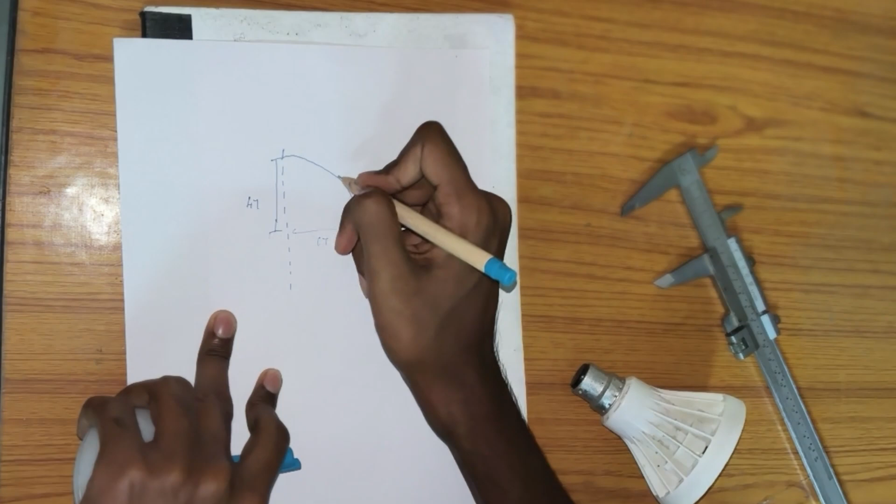We don't have the measurement instruments to take the measurement of this, so this is not actually the radius. This is actually the diameter, outer diameter 77. So to get the radius, we have to divide by 2.

Coming to this part, we have this structure you could see. A chamfer, a straight one, and a chamfer again, and a straight and a chamfer, and a whole straight to this, and a 90, and again a straight, and again a 90, and a little curved one.

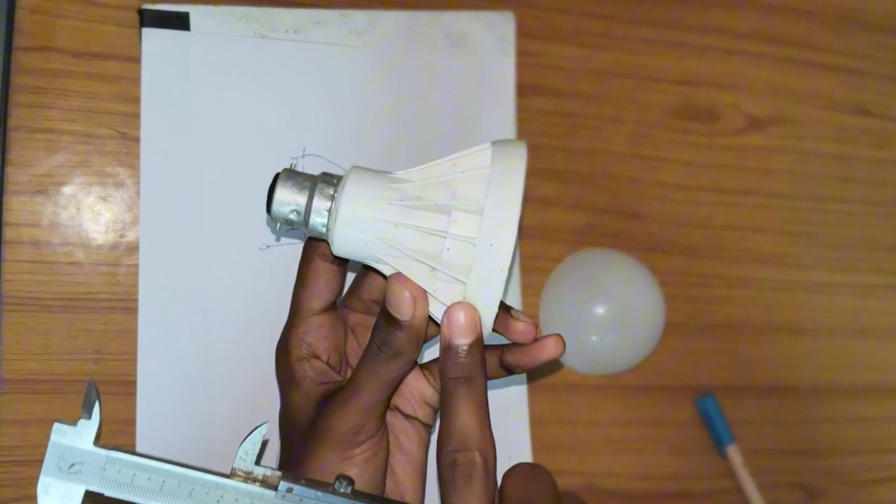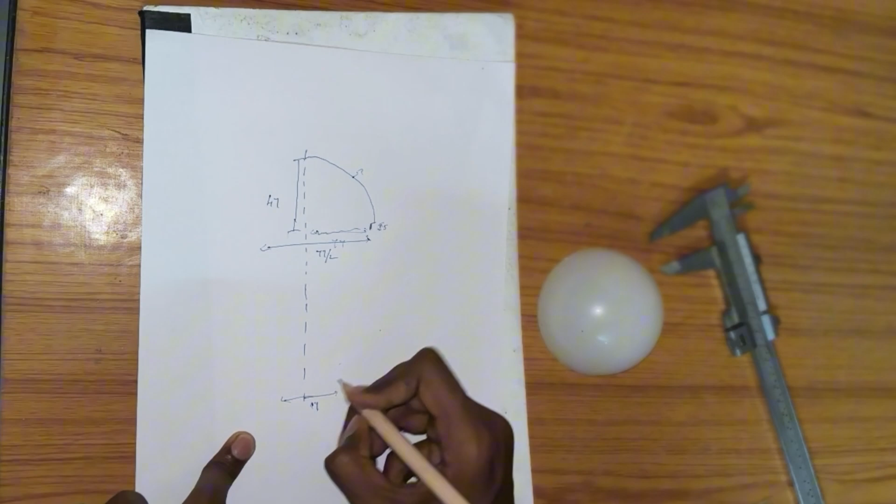So what you are going to do is use the same method, Revolve. We are going to first take the outer one. So this one is actually 47. From here, this is the total - we get 47. And coming here, this is a little one.

Getting the length of this one, you can use the back side of the vernier. So for that you get 12. So the height of this is 12. Maybe the chamfer parts could be just approximate for this one - for the upcoming videos we could get the accurate reading of those.

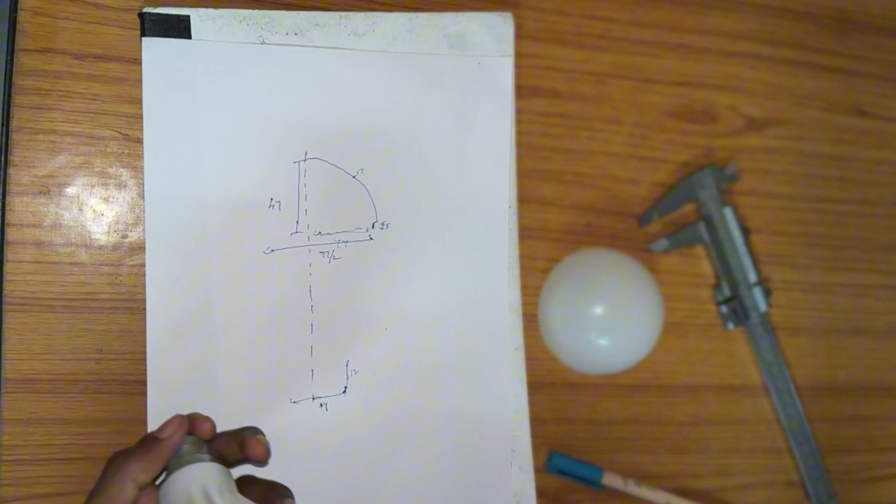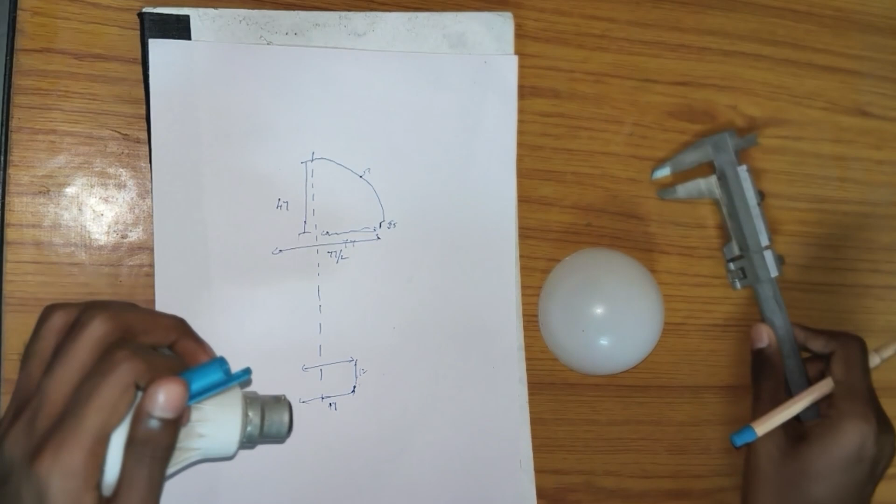Then after the chamfer, we can go with this, again it is 9. From here to here is 9, the height of this. So for this, the outer diameter is

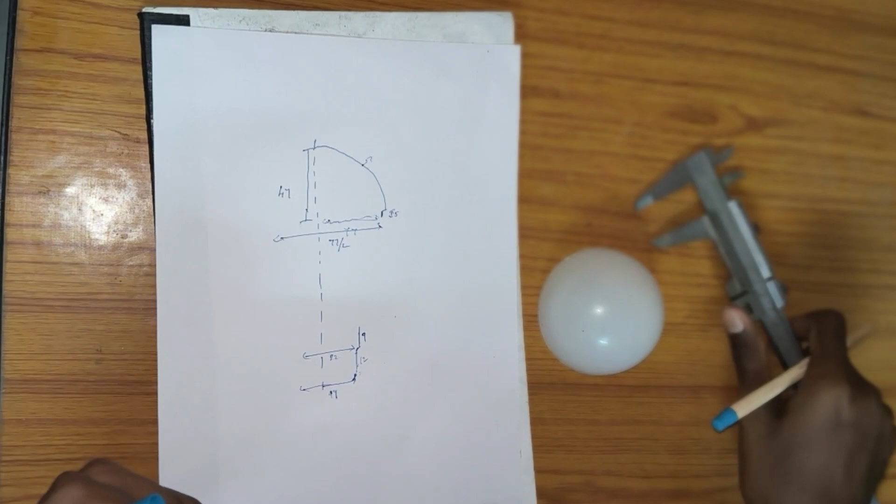22. So it is 22. Then we have to measure this, and this is 9, and the outer diameter of this part is actually 26. So from here to here is 26.

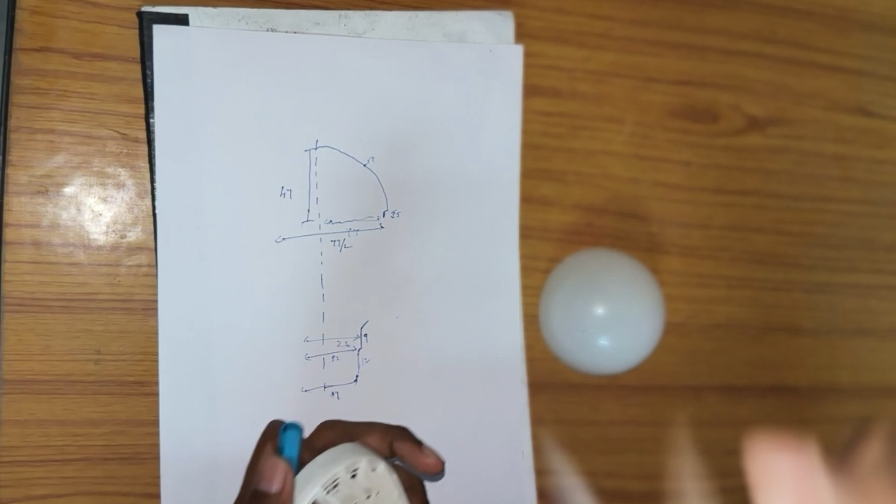To measure this, let's take this chamfer part as like this, and after that we need to measure from here to this - this is actually a straight one. So let's use the depth scale, and the measurement we get is actually 47... I think probably 45. The measurement we get from the depth is 45, so the height of this is 45.

Next, getting into this side, the 90 degree, we have a step over there. For that we have 8. This one is 8.

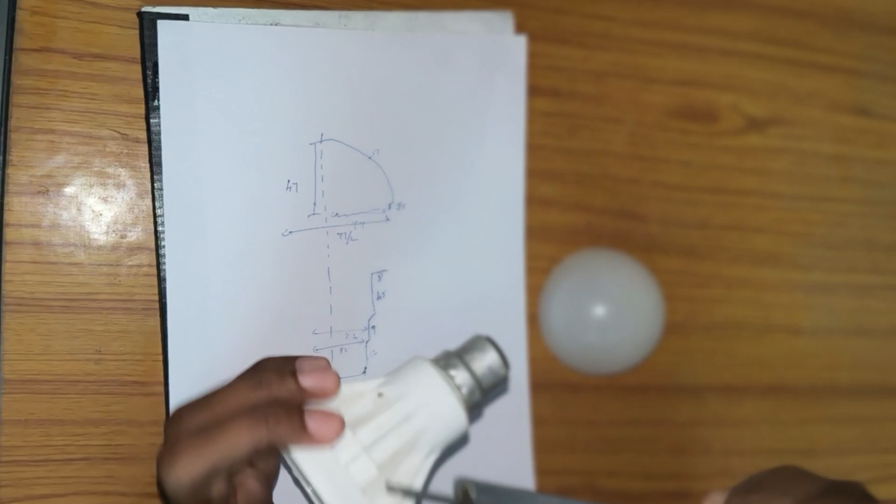So again we got a straight over here. Using the same technique to measure it out, we got 11. This 90 is actually 11. Getting here, we need this one, and again using the same method, we got 11 as well - same 11 actually. Both are actually the same 11.

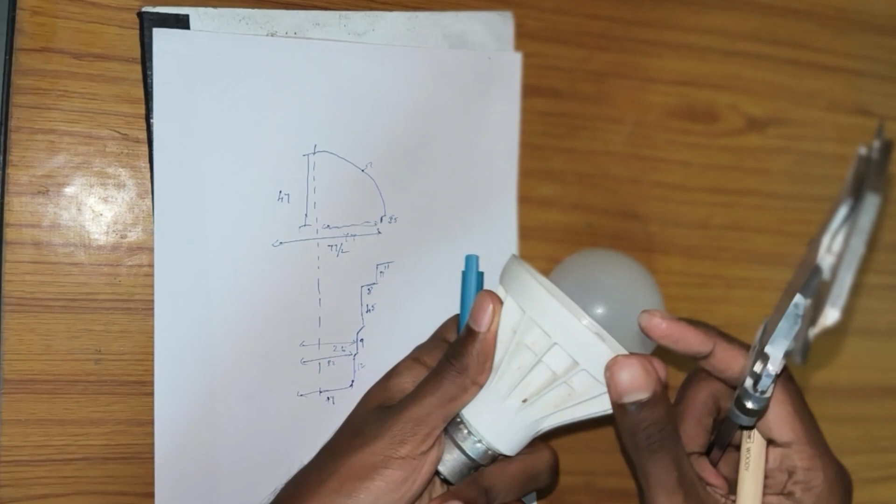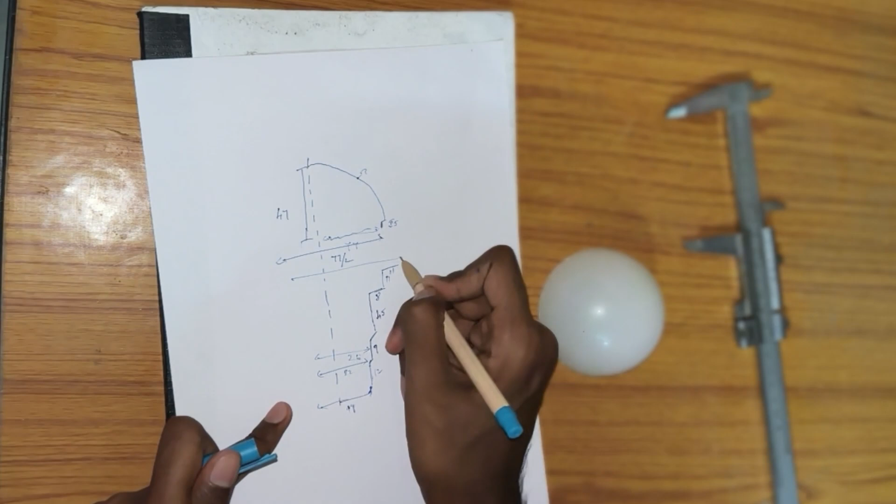Then coming to this part, we have a little taper, and we don't need to measure this. If we get the outer diameter, we can have a taper line over here. So we need to measure only the outer diameter, which is actually 80. So from this to this is 80.

So I think we have got the rough sketch of this one, and we could start drawing. This is actually negligible - we can just connect from here to here, so this is not a measurement we needed. And if you want, you can just add these squares, which is also negligible. We need only this and this to be attached. So we got the exact measurement of these two things, and it's getting inside.

So let's start with the design process. Getting into the video.